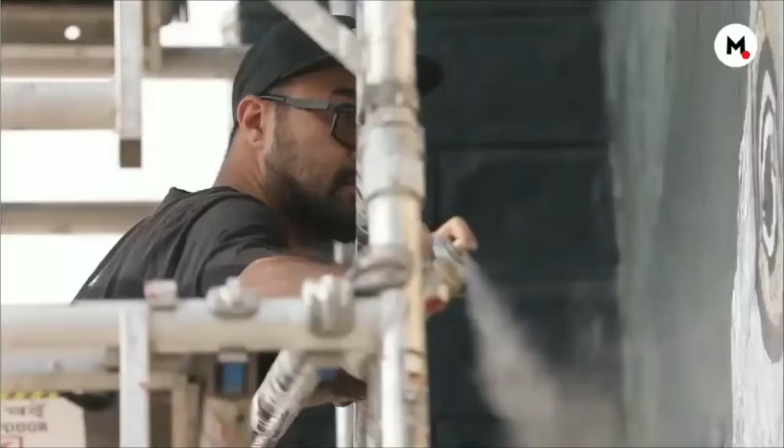I've been traveling all through the ghats, walking through that, and especially when I saw this ghat from the other one, it was so beautiful.

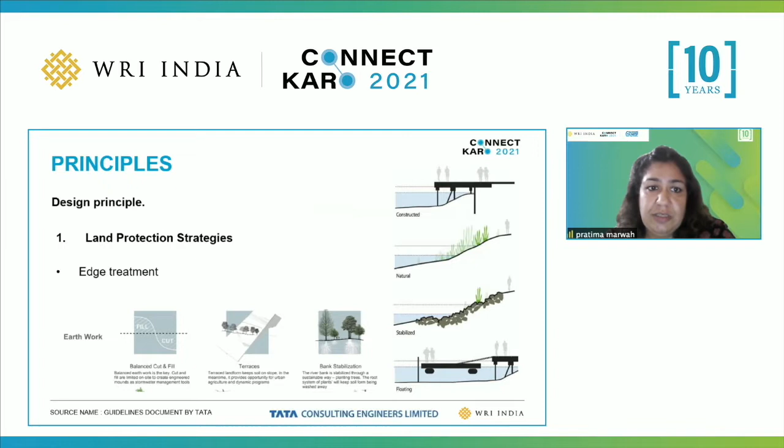The restoration detail is more about the riparian edge and the in-stream habitats. It's important to make the water edge softer - the sponge effect is important. So maybe we can create a stream in a different angle, a different riverfront in a different perspective. As landscape architects, we can work on the engineering, but we have to look at the softer approach rather than hard engineering approaches.

These are some of the materials we can use to reduce the hardscapes in our planning strategies, in our design principle. Water management, of course, is very important for any ecologically designed riverfront.

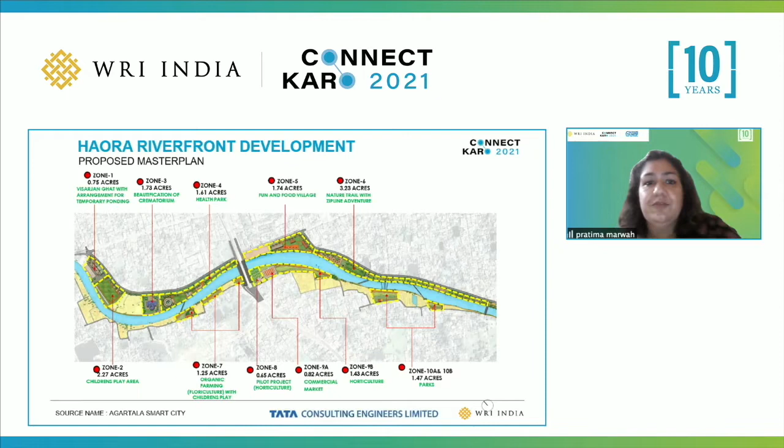And then the theme was carved out. Of course, it's a huge city-level riverfront, so that's very different - when we do small ghats along temples, or a small riverfront, versus a city level, the character changes and many elements come into place.

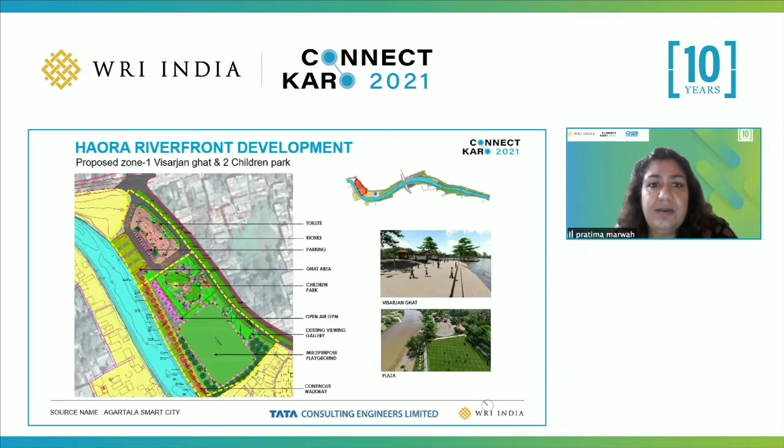In Namami Gange, we are still doing - like creating a children's area next to the Visarjan area, a space where we can have culmination spaces. This is a Visarjan Ghat with a children's play area around it also.

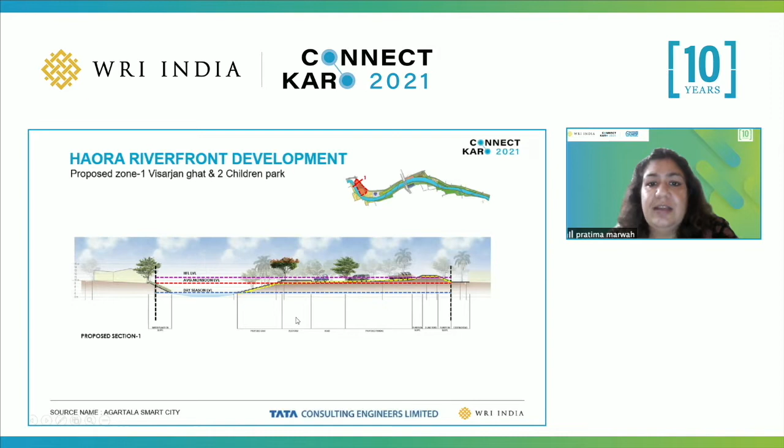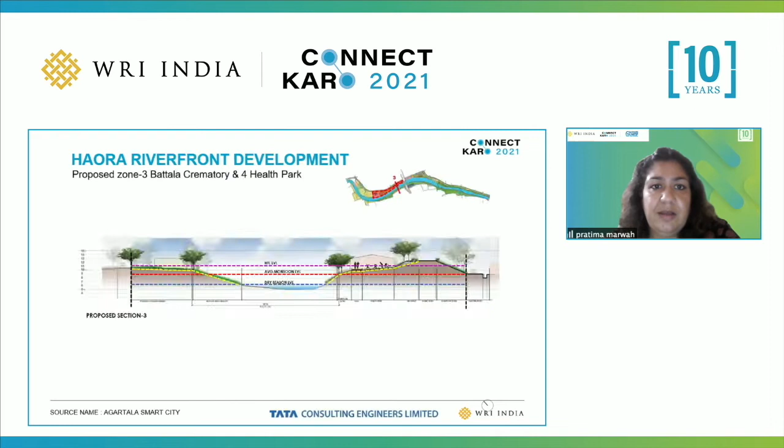Keeping the ecology and the riparian edge greener with softer edges, the spaces were carved out. This is the health garden. In Namami Gange also we are doing this, the health gardens, carving out those spaces. Then the health park, where medicinal farming is there.

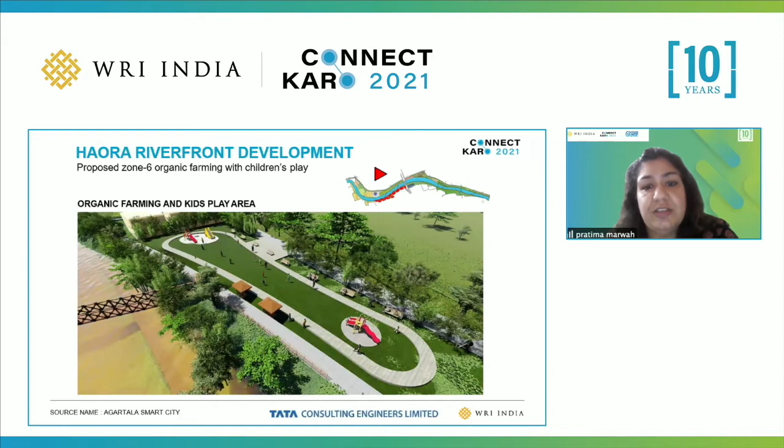Community participation is very important here. Then these are some aerial views, shots of the design. It's in construction stage, so I don't have existing site images to show you.

Organic farming is an important element along the riverfront, so at Namami Gange also we are doing this. These are some of the inspirational design elements which were there.

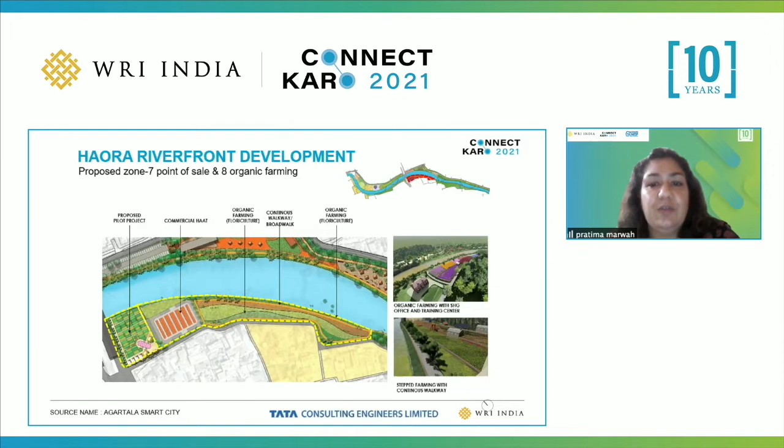I had a very minimalistic interaction and work into this project with the team, because I was involved in Namami Gange. But whatever I could guide them with while working on the project, I used to do that. And these are some images of the organic farming project. So this is what I have.

One thing I forgot to mention is that in the book, the documentation, we actually worked on the O&M aspect of the riverfront. We created the infrastructure, but for this creation to go a long way, the operation and maintenance is important, apart from the funding done by the government of India. So we made a chapter on operation and management, so that the guideline document will help different municipal commissioners in their jurisdiction ensure our projects are taken care of henceforth. O&M is the key for any sustainability of a project to survive in the long run and be maintained well.

So I think I'll end it here. I think my 10-minute slot is over.

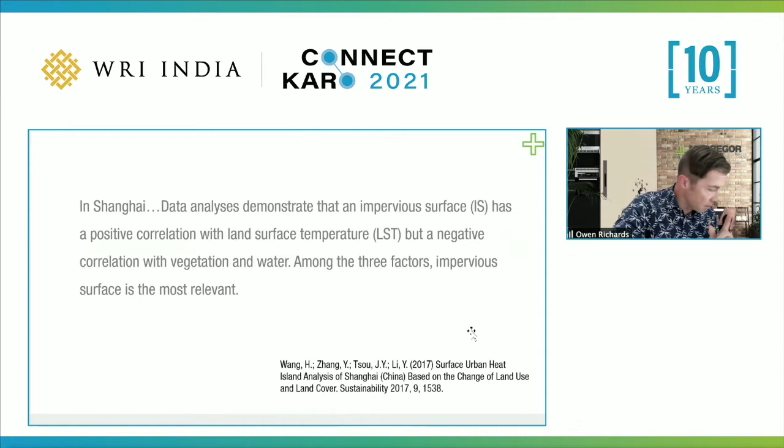But what currently makes integrating stormwater so challenging? It's our reliance on conventional approaches, conveyance principles and end-of-line management. End-of-line solutions, large solutions, high pollutant loads to one solution area, infrastructure costs, management costs, etc.

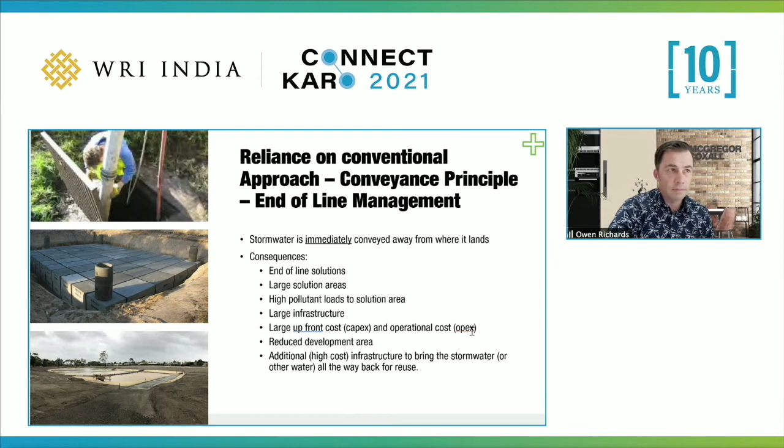In India, direct connections to waterways are an ongoing issue and challenge, detrimentally impacting this environment and its function. The other challenges in India are a lack of environmental considerations in the planning and construction stages, lack of best practice stormwater management and stormwater knowledge, institutional coordination, culture, operation and maintenance of infrastructure, complex political, legal, and cultural backgrounds, lack of hydrologic data, drainage network records, miscommunications between disciplines through a project stage, and poor understanding of roles and responsibilities.

So how do we undo these impacts? Well, we look to undo the imperviousness, or how we've crusted the environment. In the agricultural sense, how those grounds have been compacted, and we try and uncompact them. In the urban sense, poke holes like Swiss cheese in our urban environment to let the water soak back in.

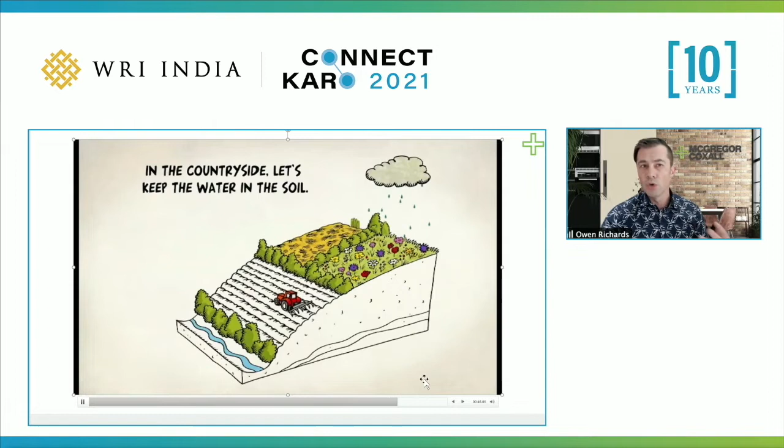So in the urban sense, revegetate, but also we need to look at the soils and the porosity of these soils and how they actually support the growth and sustainability of these green infrastructure systems. In the agricultural context, this is where we look to holding back the water, utilizing it more to sustain a thriving agricultural landscape rather than just a single-use aspect towards water, as we do with other products such as plastics.

How do we undo the impacts? I just covered that. So this is through water cycle and landscape regeneration, and there are two contexts. There's the rural context, and I don't have much time to cover that today, but in essence, what does this look like? In the mid-1970s, Australian farmer Peter Andrews released natural sequence farming, and you might see a lot of this in projects in India going forward.

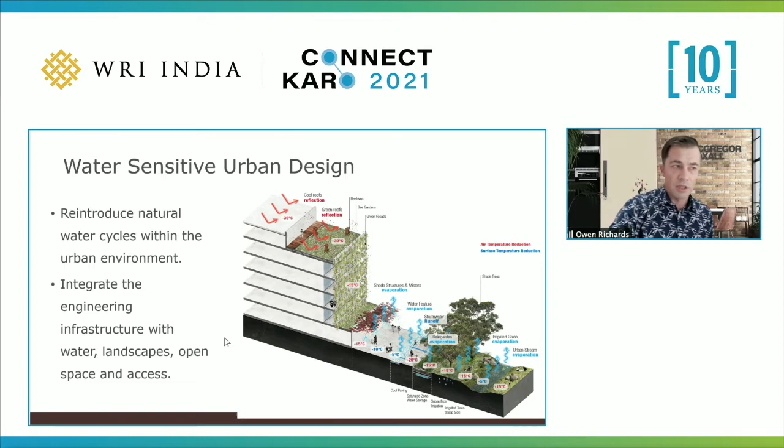This is what we call natural sequence farming for the agricultural landscape. But in the urban context, what does this look like? This is called water-sensitive urban design, where we reintroduce the natural water cycles within this environment and integrate the engineering infrastructure with water landscapes, open spaces, soil and vegetation.

How do we do this? Well, this is a principle I devised in 2016: we look to source control for stormwater management, but at the smallest possible scale. This is called snowflake management, where we manage rainfall at the smallest, easiest possible scale. That is easy to manage - snowflakes mean low cost, low volumes, etc. The more that flows accumulate and send down the stream, the harder it is to manage, the more volumes you have to deal with.

It's also moving from grey to green. It's integrating blue and green infrastructure to what we call living infrastructure. It's where we look to maximising integration of vegetation, soils and water systems. This is actually a common goal across India currently, through blue-green infrastructure in cities by 2030, which isn't that far away. So there's a lot of work to be done.

But most importantly, it's through creating healthy soil, because without healthy soil, you get compacted, dry, lacking nutrients, lacking water. The water is repelled. Without that, the green infrastructure will not be sustainable.

How to apply it? It's through a methodology, a device called water planning, but we need to confirm what is actually in the environment - we can't just make assumptions. We need to confirm what the geology is like, what the soil porosity is like, and then we undertake a micro catchment assessment. So we don't look at things at a regional scale - we zoom in as far as we can and see how we can most maximize the reuse and recycling of our water systems. This is just a pretty broad diagram here of different scales within our urban development that we look at.

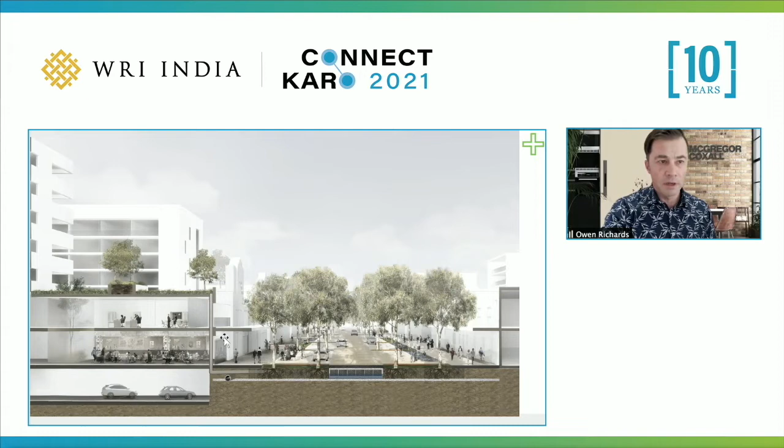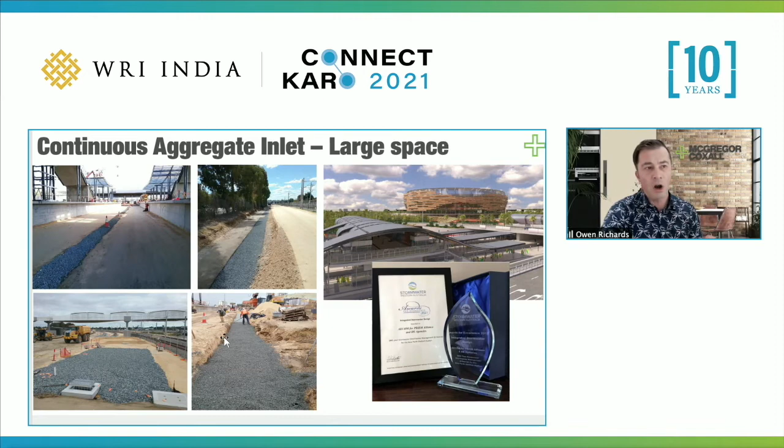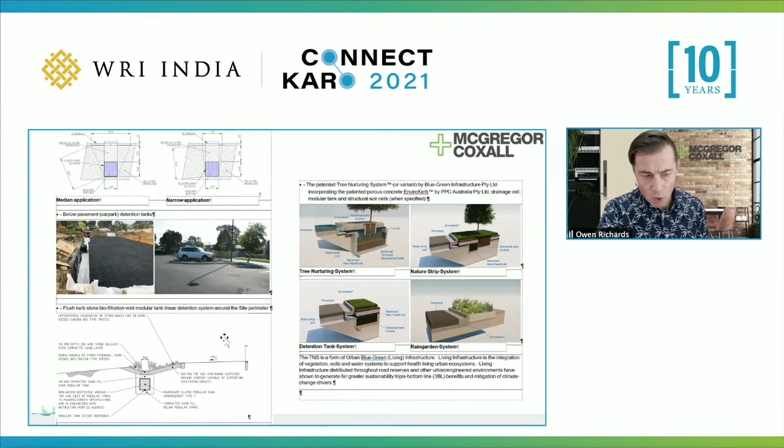An example of a source control retention system within an urban environment. A technology that won me an award back in 2015 in Perth, which is just using bio-retention trenches and stone aggregate, because stone aggregate is very porous, so it takes a very high uptake of runoff. My first invention of a continuous aggregate inlet, which was actually responded to by Professor Tony Wong in a presentation in China as a very leading biomimicry device. My second invention, a tree nurturing system, which introduces more climate adaptive processes as well.

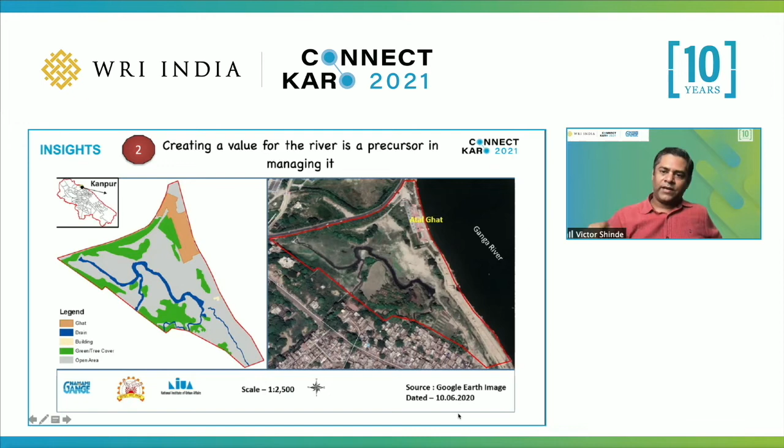So what Kanpur has done - I'm sharing a couple of examples here. What you see on the right side of your screen is the Atal Ghat, a very popular ghat in Kanpur, and there's a large area behind it which is largely unutilized and currently serves as a site for solid waste dumping. The city has decided to take up that entire area and turn it into a riverfront park.

Pratima showed us so many examples of wonderful designs, so I won't get into the details, but the idea is converting that wasteland and the land adjacent to the river into something that citizens or residents will be able to use on a very consistent basis throughout the year.

Another interesting thing they are attempting is a cultural theme boat ride along the Ganga. Just to give you a brief background, a few kilometers upstream of Kanpur is a city called Bithur, which has a wonderful cultural and religious significance as well.

Luv and Kush, the sons of Ramji, were actually born in Bithur. So there is that very strong cultural connect that place has, and the city has decided to leverage on that through a themed boat ride, very similar to what you find here in Akshardham in Delhi.

Finally, number 3: what we also realize is that managing an urban river is an incremental process. Some interventions can take place quickly. This is really important in context of the urban river management plan, because while it has been designed as an action plan to take place over a few years, certain actions will require a little bit longer. Let me give you an example.

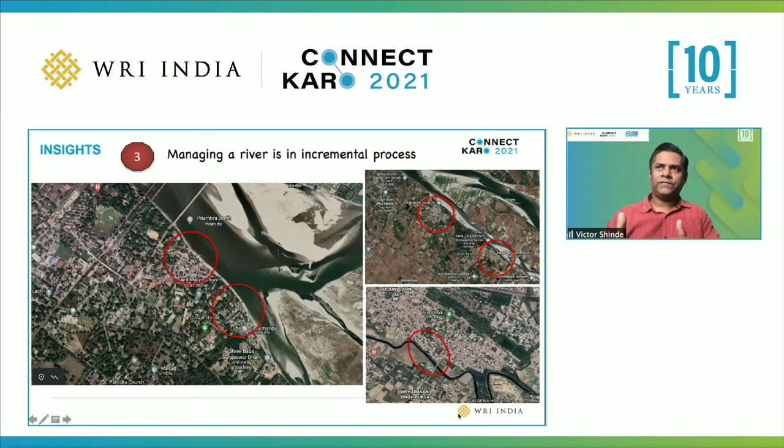But what you see is, in these circles that I have marked, a lot of the area is already encroached. The floodplain is right up to the edge. So it's not going to be very easy to remove them overnight and replace them with a riparian buffer. So what Kanpur has done is do it in an incremental fashion.

They've identified certain pockets—there are 13 here, along the Pandu River—where they will now, incrementally over a period of time, take up these 30-meter riparian buffers.

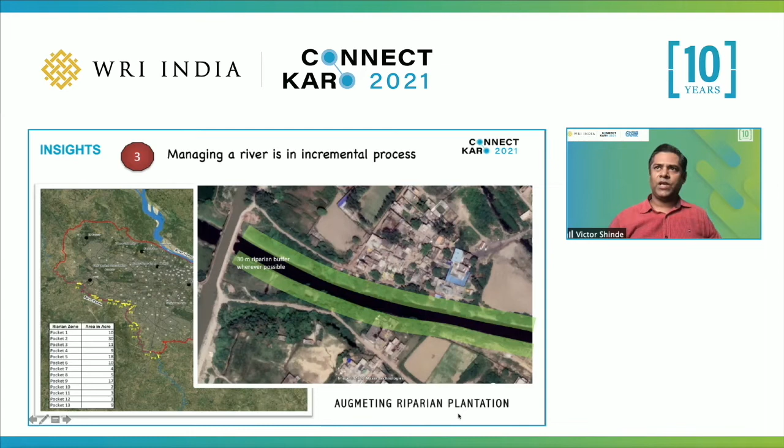And in the process, for the areas that are encroached where it is not possible, they will rely upon the master plan, a very similar approach to what the Delhi master plan has used. So when those areas come up for redevelopment, this 30-meter buffer would be in the plan, so that development doesn't actually happen in those areas.

So finally, just one last minute—I hope some city officials are also watching this seminar—the idea of presenting this is that it's not very difficult, not very overwhelming, to prepare an urban river management plan. It just takes a coordinated effort, like Ian also pointed out, and certainly it can be done.

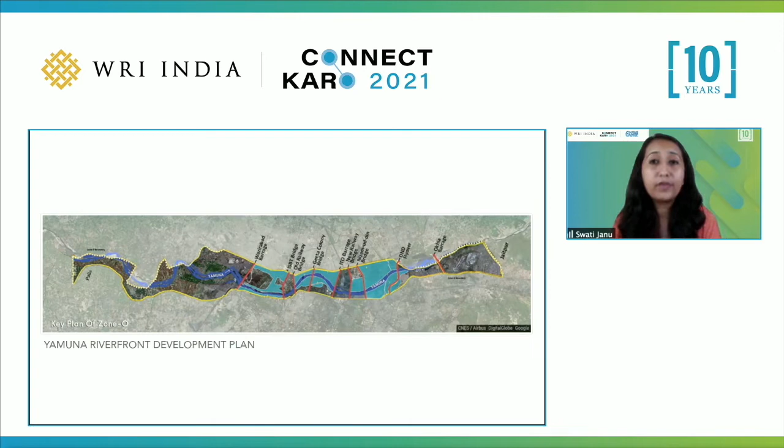What is happening today is that, because of the Yamuna Riverfront Development Plan, farmers are facing regular evictions. The plan itself talks about important things like public spaces, parks, jogging tracks, cycling tracks, and all of these are much needed—the city, especially central and East Delhi, is much starved for open spaces. So these are the kind of open spaces we need. But at the same time, are these going to be spaces only for a few?

Because on the other side of these plans is what we see every few weeks: farmers' houses being demolished, farmlands being bulldozed over.

Can we not have parks and farms together? This is the sort of integrated vision many of us have been trying to talk about. If you go to the Golden Jubilee Park, you'll see that the people working there—cleaning the pond, taking care of maintenance—are the farmers themselves. This has happened naturally. Can we formalize this? Pratima was talking about O&M, operation and maintenance—this is the best way to go ahead if we have an integrated vision of O&M.

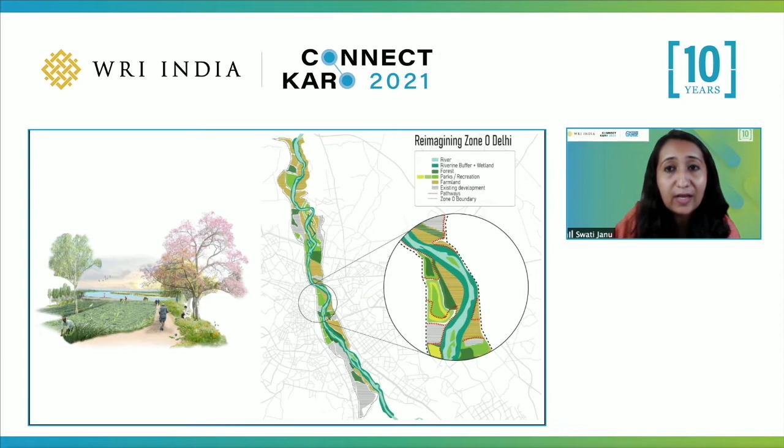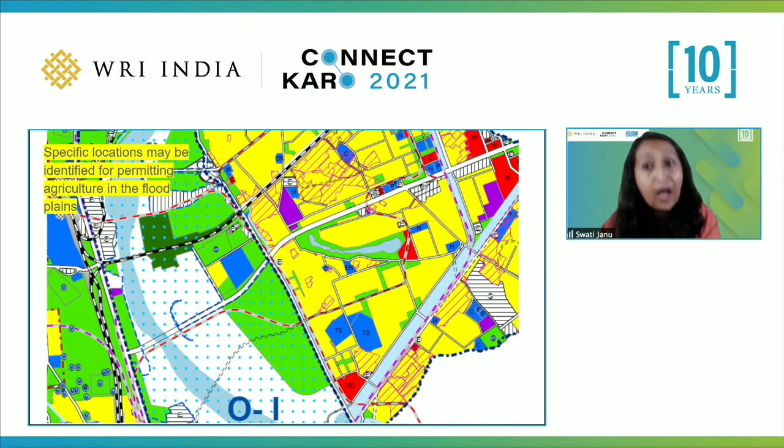Thank you. So this is the integrated vision that a few of us at a civic campaign called Main Bhi Dilli have come up with—can we have parks and farms both? A few of these suggestions were shared with DDA and NIUA, and Victor has been part of these consultations as well. For the first time, this master plan acknowledges the presence of agriculture and allows it, which is a great progressive move ahead. But at the same time, we need to create regulatory frameworks urgently before the farmers are removed. Other cities have done it.

Kolkata today produces 50% of its vegetables in its wetlands within the city. Mumbai has farms along railways as a way to prevent encroachment. Can Delhi continue to protect its custodians of its river? These are the true friends of the river. Can we imagine a food secure future where 50% of our vegetables are grown within the city? Can we work together towards this sort of vision?

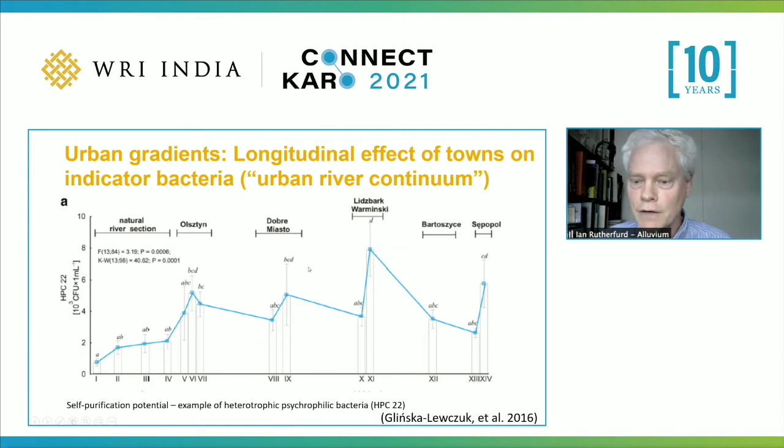I think that's really important for the very impressive Ganga program, for example, getting targets for master planning that relate to this continuum down the valley. But these gradients also relate to individual cities as well, this gradient from the edge of the city through into the city. That's what I'll talk about now.

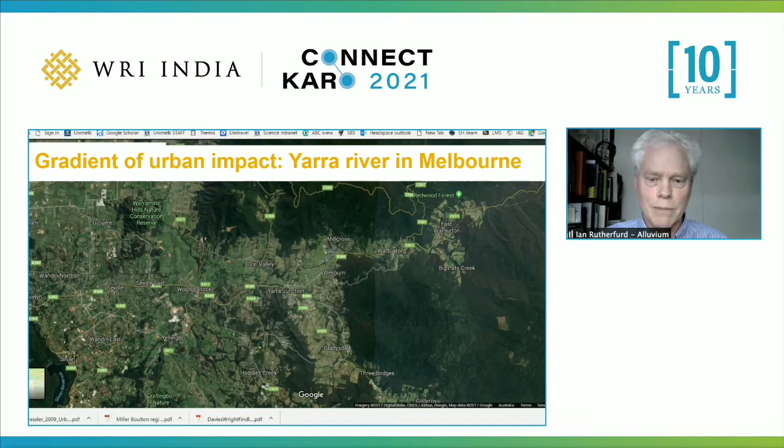So here's an example of a gradient. I was trying to find one from India, but this is a good one from just outside my window here, which is the Yarra River in Melbourne, not too far from where Owen is as well. The river here is flowing from right to left into Melbourne, and there's a very strong environmental gradient along there. This is work by Chris Walsh and colleagues.

So this gradient is really powerful across the city. The more imperviousness in the catchment, the worse the environmental condition. That's important for understanding planning. I'll come to that in a moment.

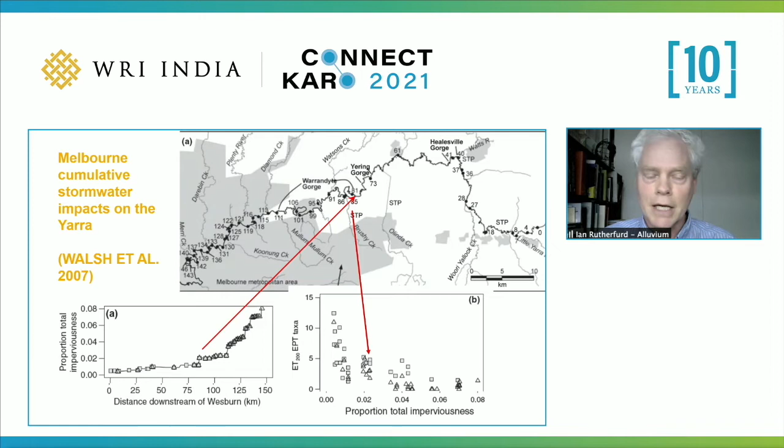These urban water gradients don't just relate to biodiversity, they relate to pretty well all the things we've talked about today. Floods tend to increase in gradient down valley as we get more urbanisation. Water quality declines. Biological values decline. We also get a decline in the freedom of the river to move. So certainly in Australia, most urban streams are channelized.

They're concrete or stabilized so they don't cause trouble. We also tend to get a decrease in social amenity values as the stream gets more constrained and declines in condition, with more waste and so on. So there are strong gradients as we move down valley in a stream system.

But many of these gradients can be moderated by having more space, and this is really the theme I want to talk about today, the importance of space. For example, floods — you can dissipate floodwaters with more space on the floodplains. We also know, as the river frontage document shows, that all these cities are right up to the edge of the river, meaning there isn't any space. So that's the problem: how do you dissipate floodwaters when you have no floodplains?

Similarly, you need space to treat water and stormwater. Sewage treatment works take space, stormwater needs space to be managed. Owen showed you can manage some stormwater in small areas, but cumulatively you need quite a lot of space to manage all the stormwater a city produces.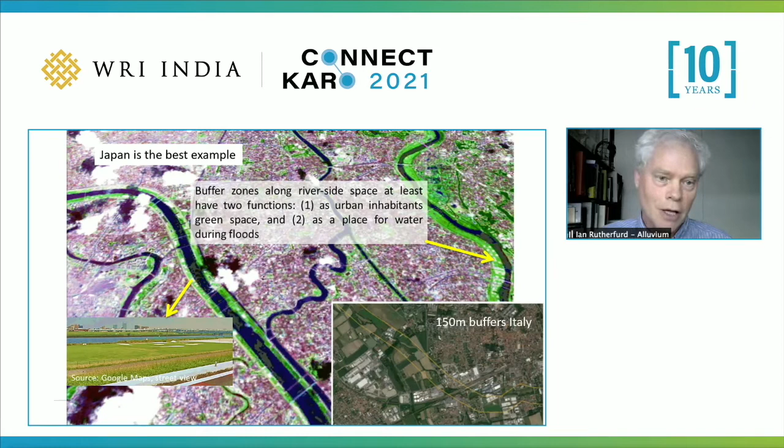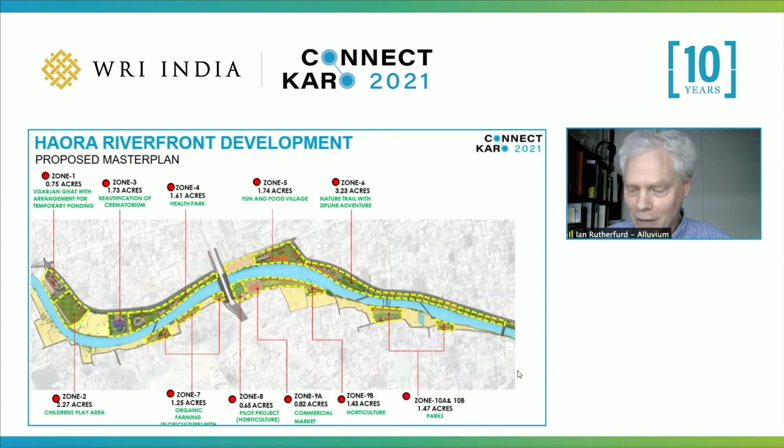And there's another example from an earlier talk, a really interesting case — I think, Pratima, this is your one, about riverfront development. Again, if you don't have that space and have to buy it back, it's almost prohibitively expensive once the city is developed.

But this is prohibitively expensive to pull off when you've got such high-value urban areas. We've also touched on the social justice implications of doing that - it's often for the people who are rich, and it's the poor who are the victims of these developments, not always. So achieving water-sensitive cities without some space is difficult - getting the space retrospectively is expensive.

So what do we do? Well, we know about the rapid growth of Indian cities, and this is when buffers need to be reserved. This is Chandigarh, and you can see from 1990 to 2017 the incredible rate of expansion of that city. That expansion has happened up the catchments, up the valleys, and has occupied those areas. That's not unique to that city.

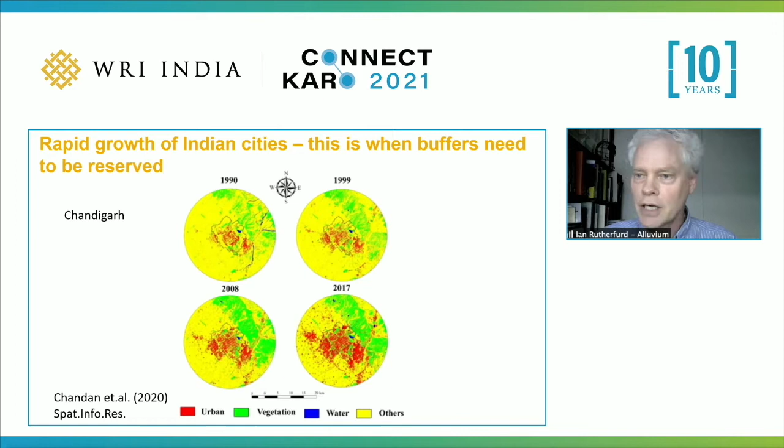Mumbai is another example. This is some modelling that shows the expansion to 2030, and you can see that most of these cities expand up valley. They're moving away from the coast or from the big river, moving up the smaller rivers. So that development is happening up the valley.

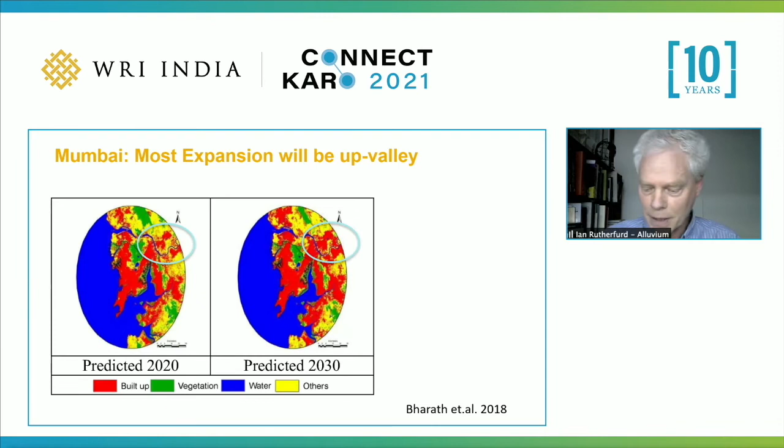So the key point I want to make today is: the time to make room for the river is when the city is expanding. It's much easier to do that in the peri-urban or rural areas into which the city is expanding. That's the opportunity - this will allow protection of the stream.

It will protect the downstream improvements that are being made. I really want to emphasize this point. Across India and across the world now, we're investing in extremely expensive improvements in waterway corridors, which are then threatened by expanding areas at the top, which means we've got more flooding, more sewage, more stormwater. So as fast as we're fixing the river at the bottom end, it's being undone by urbanisation expanding at the top.

This is not unique to India. It's happening outside my window in Melbourne right here, and we're struggling to deal with it.

So it also allows for future opportunities. The way to think about this is to ask yourself, how would we make our cities better? Well, we'd probably plan them differently than they are now - we'd probably provide all these corridors. Well, we have the opportunity to do that in the growth areas of the city.

This will dramatically reduce the cost of future opportunities. If we don't plan it now, it will only get more expensive. And establishing a buffer relies on strong land use planning and regulation.